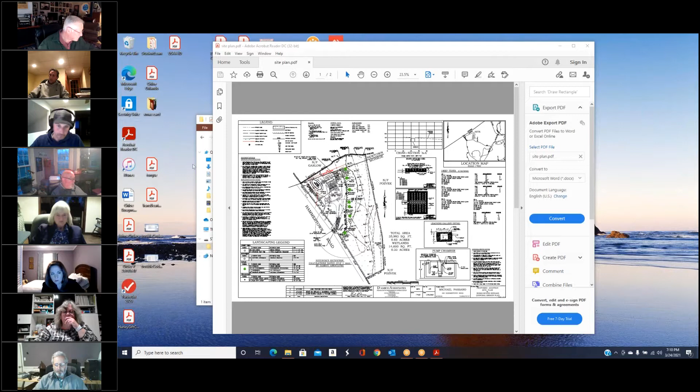What we're proposing is in an area that was already cleared, and you can even see on the east side there's an existing shed on the other side of the wetlands, which shows the entire parcel was really being utilized, and it was obviously disturbed prior to this proposal. So I don't think anything we're doing will be detrimental to the wetlands. If anything, I think we'll be cleaning it up.

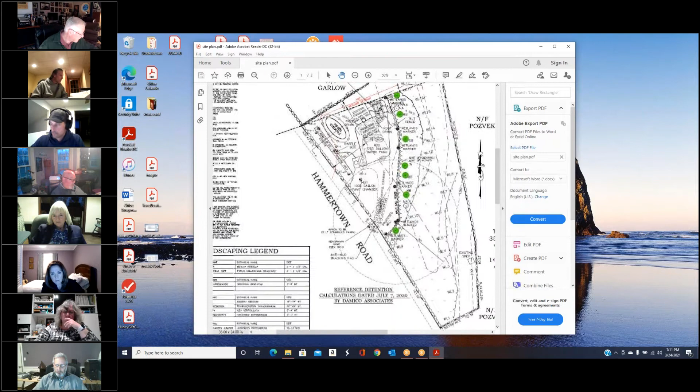We're going to keep the existing gravel driveway, so we won't be extending a driveway at all, and we won't be going towards the wetlands at all, except for the proposed drainage galleys to mitigate the increase in runoff from the proposed addition. You can see there are 4 proposed galleys directly to the east of the existing dwelling, approximately only 10 feet away.

From there, we're actually going to fill just a little area to make sure we're above the modeling for the detention galleys. There's no fill required for the septic system, and the conditions for the septic system were fine. As a matter of fact, it's already been approved by the health department.

The other thing we're proposing is wetlands plantings, and I have them just over what I call the limit of clearing and limit of activity. The only activity past that would be just the plantings, proposed to plant right along that clearing limit to help ensure no one goes further into the wetlands.

We're also proposing a split rail fence, which is the heavy dashed line right along there. You'll see the silt fence, then the split rail fence to the left of it, and to the right of it is the limit of clearing. I showed the proposed plantings just to the right of that.

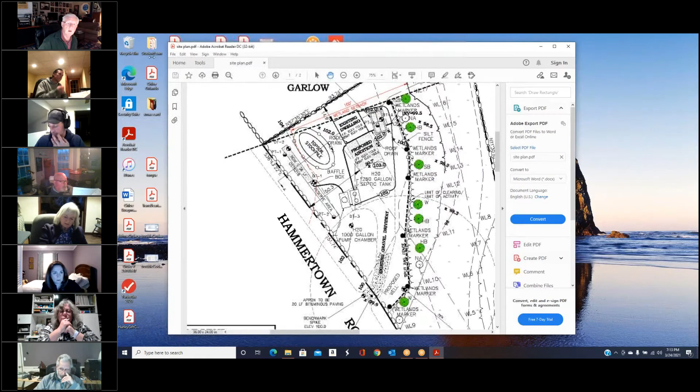I know there was confusion as to what's the limit of clearing and why the plantings are past the limit of clearing or limit of activity. But like I said, the only thing we're proposing is those plantings. If necessary, we can move the plantings back on the other side of the limit of clearing, or vice versa.

We're also proposing the wetland markers, shown on the plan. There are 6 wetland markers, mainly at every bend, so that they're less than 50 feet apart.

The septic system, like I said, was approved. It's a pump up system, and the system itself runs right along Hammertown Road, so it's as far as possible from the wetlands. The closest activity to the wetlands would be the well. We have to keep the well 75 feet away from the septic system, so we placed it to the south as far as possible to ensure we have that 75-foot setback.

Other than that, I believe the plan is basically just one little residential dwelling that we're increasing the size of slightly, but everything else, there's basically no other activity on the site. I'd be glad to answer any questions.

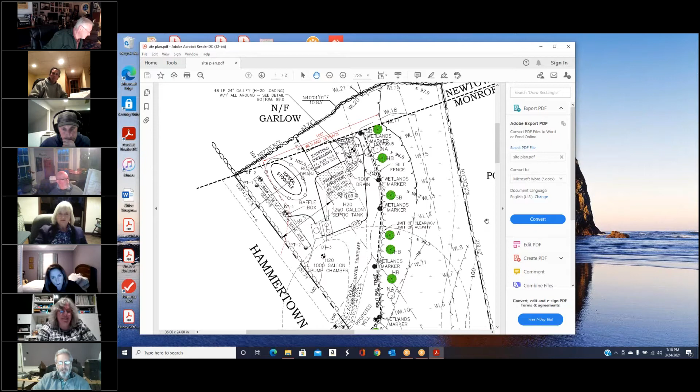Alright. How do they access it? Do they trudge across the wetlands to get there? I think you could actually walk right to it. Even though it's shown as wetlands, you really can walk to it. If the commission feels people are going to constantly walk there and cause a disturbance, I'm sure we could talk to the applicant and maybe remove the shed, or replace it in front of the silt fence so they won't have to cross the wetlands.

That might be a boon to the future owner rather than having it. I don't know if the homeowner would want to be tracking all the way to that shed. I mean, what's the point of the shed? That's what I was getting at. It might be a good thing, but that's not our call. I just wanted to throw it out there.

Is there anything else that drains to the leaching gallery? The only thing going to the leaching galleys would be the septic system, and the galleys in the back are just for the roof drains. Okay, that was my question.

Scott had mentioned something about the footing drains. Have they been revised? Yes, I originally showed footing drains, but realized that was a mistake on my part because it's actually a slab on grade. The existing dwelling is a slab on grade, and the proposed addition is also going to be a slab on grade, so there is no need for footing drains.

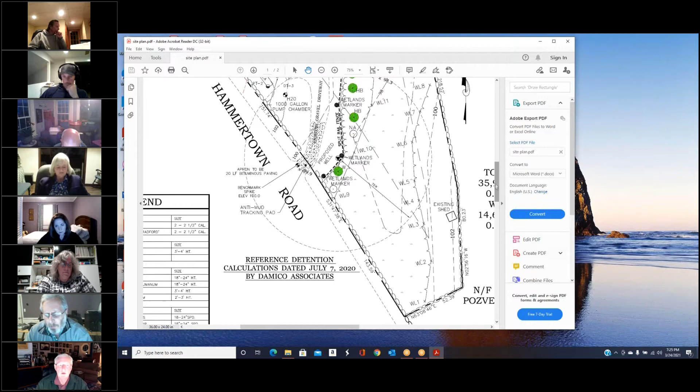So, since the brambles and the multiflora rose do not thrive in the shade, should we be planting more shade trees to keep them under control? I think right now there's a couple of scattered trees. There's a cedar tree, a shagbark hickory, and I don't remember the other. So there's partial shade already. I'm not familiar with the planting plan because I wasn't involved in that, so I'd have to punt that question back to Mr. D'Amico.

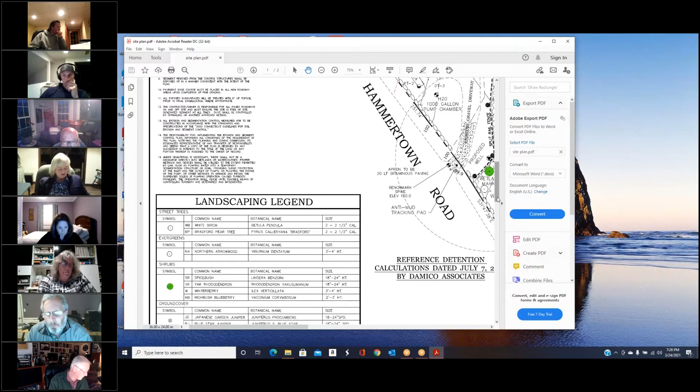Okay. All right. Thank you, Mr. Danza. You answered all my questions. Then back to Mr. D'Amico. You mentioned a bunch of trees and bushes that you were proposing to plant, but there's no quantity. We would need to have that in order to approve this, so that we know exactly what it is that we're talking about. And if the area really is as sparse and disturbed as Mr. Danza was indicating, we might need a little bit more to create a better buffer.

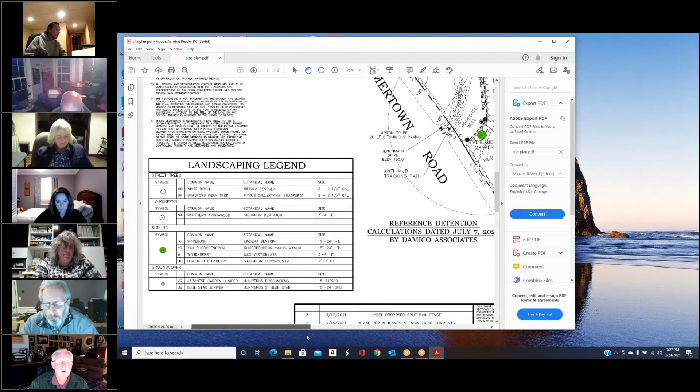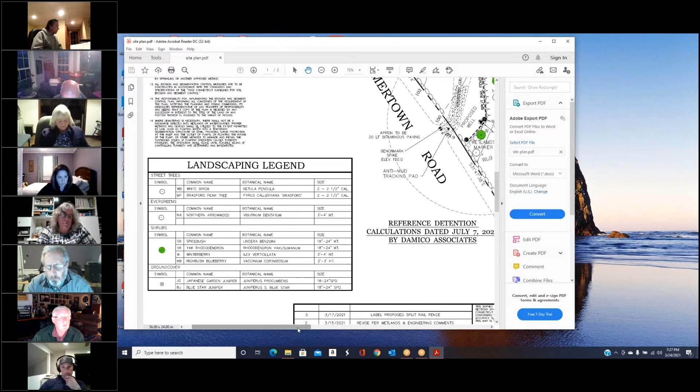What I did is I showed the plantings. If you could actually count them on the drawing, in the legend there's two northern arrowwoods, and then you could see on the other plantings there's, let's see, 1, 2, 3, I believe 3 spice bush, and then I have 1, 2, 3. I believe there's 3 high bush blueberry. So even though they're not numbered, you could see right where they are, because there's not that many that were proposed. If you want, we could add a couple more.

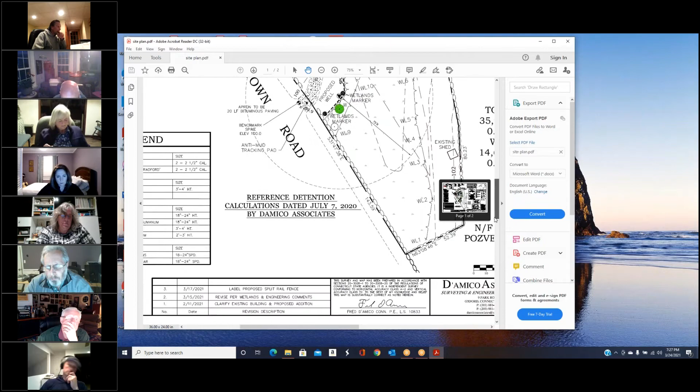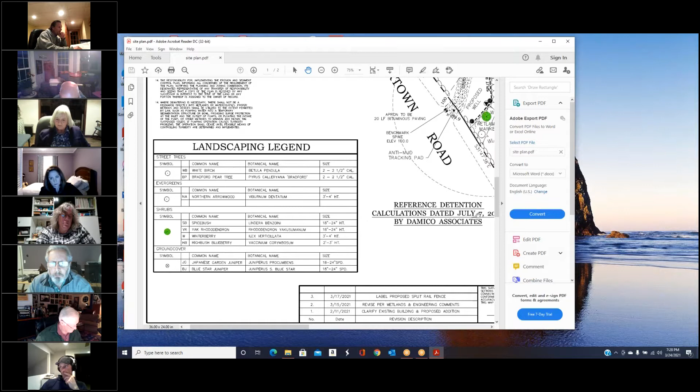That's not a problem. As a matter of fact, if it's approved, you can make that a part of the approval. If you want the plantings twice as much as what's there, I'm sure the applicant has no problems with that. But we were just hoping that it would be approved. And if we have to add more plantings, we have no problem with that. But by looking at the drawing, you could see how many plants there are, just by seeing where they are and counting them.

I'm doing just that, and I'm not coming up with the same, the two don't seem to jive. I see seven green symbols, but there's four plants in the legend. So that's one for some and two for others, which is a little bit nebulous. Yeah, I counted wrong. There's two that are labeled W, which is a winterberry. I forgot to mention those. I was counting them as something else.

So the two that are shown that have a W are winterberry. There is two spice bush, and then the HB, which is the high bush blueberry, there is one, two, three of those, and then the other small bush, which is NA. There's actually three of those. For some reason, the NA fell off the last one, but the NA is a northern arrowwood, so there should be three northern arrowwoods. I could add the quantity in the landscape legend if you need it. And if you want me to add some more plantings, I have no problem with that.

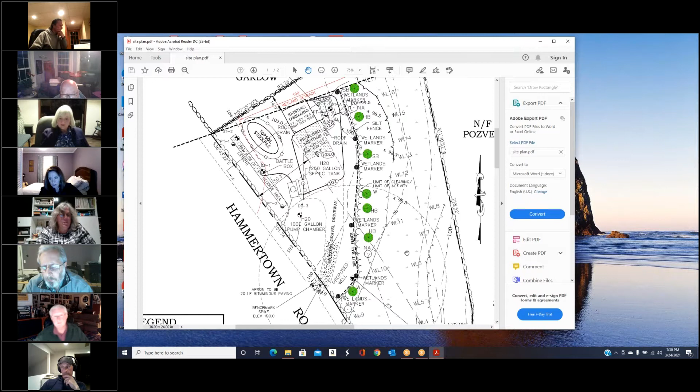Well, I can't speak for the whole commission, but I know that I would like to see it a little bit more well planted, a little bit more dense. But I will also ask the other commissioners what they feel about it. And other than that, Scott had a whole bunch of comments and I didn't know if any of them were addressed. And the same with Denise's comments. Let's make sure everybody's zeroed. I believe I addressed all of Scott's comments.

We didn't get a revised report, so I don't know from Scott's angle where that was. What's the last report you're looking at, Lois? Mine is dated 3/15/21? No, mine's 3/4/21. Okay, so I do not have the most updated copy then. Okay, Denise, were all of your comments adequate? 3/4/21? I don't even see a 3/4/21. Yes, my comments have all been addressed.

They basically were addressed in the set of plans, but in the plans we had gotten submitted, I guess some of the layers were off. I spoke with Mr. D'Amico about it, and he sent me the revised plans, which is what we have now. The details I was looking for were all on the back, and we talked about the legend and what some of the symbols meant.

Okay, and how about Scott's comments? I mean, you said you have a revised one. Are any still open? I have one that says, oh, wait, hold on. 3/18 is the one I have. I'm sorry.

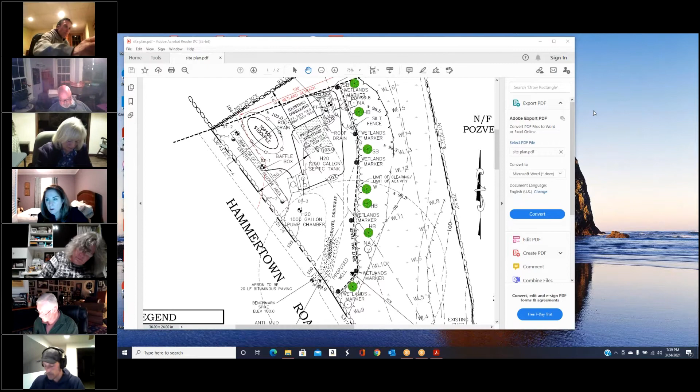So do we make a motion to close this regular hearing? Make a motion that we close this regular hearing. Got a motion to close the hearing, motion by Commissioner Gainer, second by Commissioner Hall. All in favor? Aye. Aye. Motion passed unanimously. Moving along, public hearings, we have none. Enforcement, NOV discussion, nothing. Remediation conditions, IWC 2020-02, 224 Guinea Road. Remediation plan to remove fill and replant the wetlands area.

Okay. Mr. Bjorklund was not able to make it tonight. He had another meeting he had to attend. 2 weeks ago, I received an email from Attorney Lito with an attachment. I sent it off to Dave. It still had some open-ended issue questions. And so what Dave said to me is, I sent the draft to the client and asked that they forward it to their attorney for review. I have heard nothing back. If you could share this with the IWC, I'd appreciate it. So that's all we have right now. So it's in the applicant's attorney's hands now. Okay. So we're tabling this one again? Table it again. Tabled. All right, sounds good. I don't know what else to do, if that's the situation we're in.

Okay, so application hearing determination, IWC 2021-03, 8 Crownview Drive, new home construction with associated site improvements, pool and pool house. So this is just the determination of whether it's a regular review or public hearing. Yes. Make a motion that we move this to a regular meeting. I'll second that. A motion to move application to a regular meeting, a second by Commissioner Hall. All in favor? Aye. Motion passes unanimously. IWC 2021-04, 5 Victoria Drive.

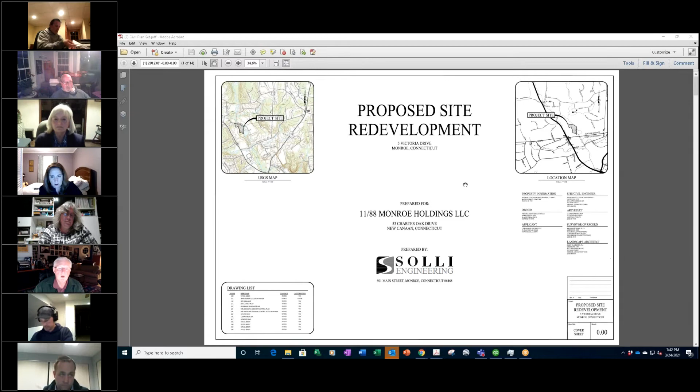For the record, my name's Kevin Solli. I'm a licensed professional engineer in the state of Connecticut with Solli Engineering. Office is at 501 Main Street right here in Monroe. So this is a site at 5 Victoria Drive. The commission's probably very familiar with it. It's the location of Ole Soccer. We've been working with the planning department for some time. There's an interested party to purchase the property, and they're looking to do a building expansion to provide an indoor box lacrosse facility. We've gone through a couple different steps with planning the site.

The zone was recently changed from industrial to business 2, and the parking requirements for the indoor recreation were reduced so we could minimize our parking that we would have to construct on the property. So we are proposing a small addition, and then essentially working within the limits of the previously approved Ole Soccer. We would assume that this would get scheduled for a full public hearing, and we'd be happy to see if the commission would be willing to accept it and then schedule that for your meeting, maybe for your last meeting in April. Does that work with your schedule? I think on the 28th.

Okay. I guess basically, Kevin, you're basically saying that you're expecting a public hearing on this anyways, right? We would, yes. Okay, so someone want to make a motion on that? Before we do, can I ask, usually when we get an application to determine, we get a chance to look at all of it, which we haven't really gotten to. Could we just flip through whatever other sheets there are in this plan set?

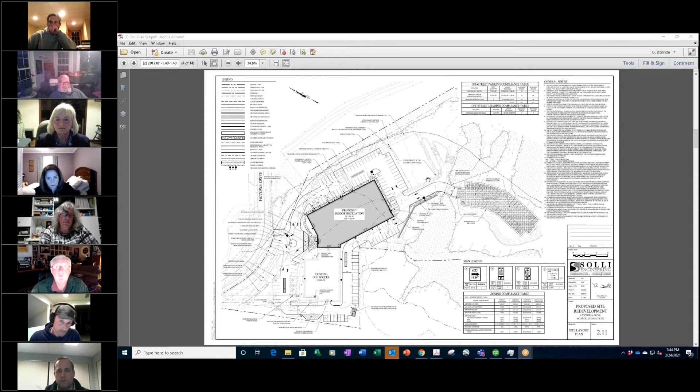Absolutely. So site plan, again, just a proposed building expansion with parking primarily around. We are actually proposing a surplus parking lot in this back area, which we're proposing to be gravel, so not to create additional impervious surface. And we are maintaining the back portion of the existing field that was established as part of the Ole soccer approvals. From a grading standpoint, we're trying to minimize grading as much as we can. A portion of the building is being constructed in a floodplain, so we're providing offsetting compensatory storage to not have an impact on the flood carrying capacity of the property.

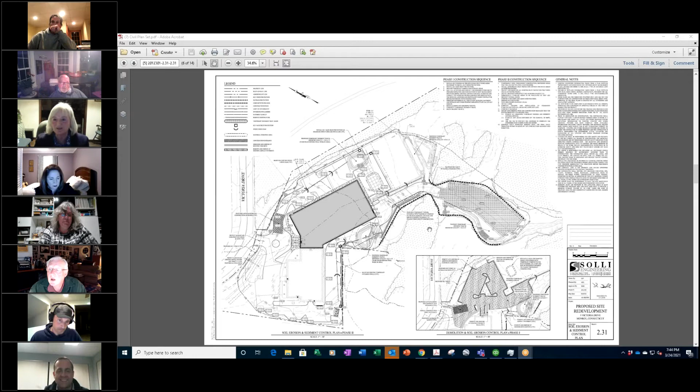Okay, I'm sorry, Kevin, I was not explicit enough. I just wanted to see what other sheets are in the plan set. Usually I look for, like, is there a planting plan? Are there things that I'm going to ask for in the future? So if I know they're there, we can expedite things. That's all. We do have a landscape plan. Yes, we do have a soil erosion sediment control plan. Our normal plan set package that we prepare. So we do have that included in our application materials. Okay. All right. That's really all I wanted to know. Thank you.

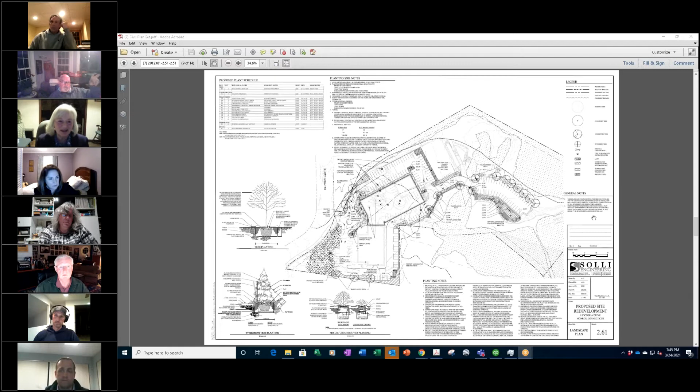I move we bring this to public hearing. Motion to bring this application to public hearing from Commissioner Spence, second from Commissioner Gingras. All in favor? Aye. Aye, motion passed unanimously. Got a question though. Did he ask for us to do this not the next meeting, but the meeting after? That's on his application timeline. Oh, okay. Whenever he gets his stuff submitted, it gets on the agenda. Okay, I just wanted to make sure because he did say that. I just want to make sure everybody knew that.

And I was able to expedite the pending legal notice that should go in next week. So it looks like potentially, Kevin, that date is correct, that we could get you on for the second meeting in April. Great. Thank you very much. Okay. I'm trying. Yeah, we appreciate it.

We're on to E, other bond release reduction reports, none. Time extensions, none. Discussion, 64 Cambridge Drive, request for informal discussion. Is this me again? It's you again, yeah. Sorry. No, it's okay. I didn't know if there was going to be any other discussion or anything. So thanks, members of the commission.

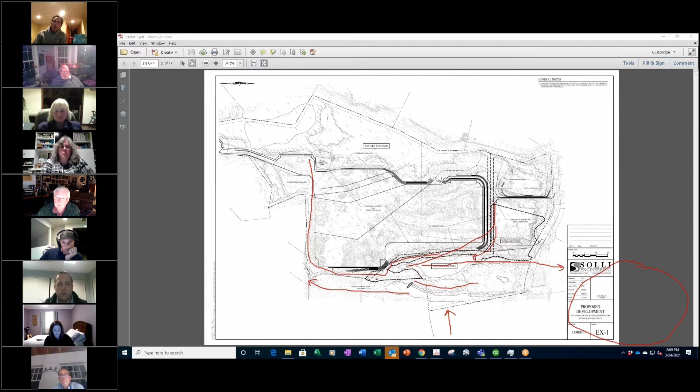So the vernal pools dry up at some point in late spring, correct? Correct. So during the period of time that they're supposed to be damp, keep the pump running, and then when they naturally dry out a little bit, would you shut the pumps down? We could. That vernal pool breeding season is essentially right around now through mid-May. So that's something we could talk through with Bill Kenny, our soil scientist, and develop that optimal plan. That's a great suggestion. Yeah, I would like to see that. That's it.

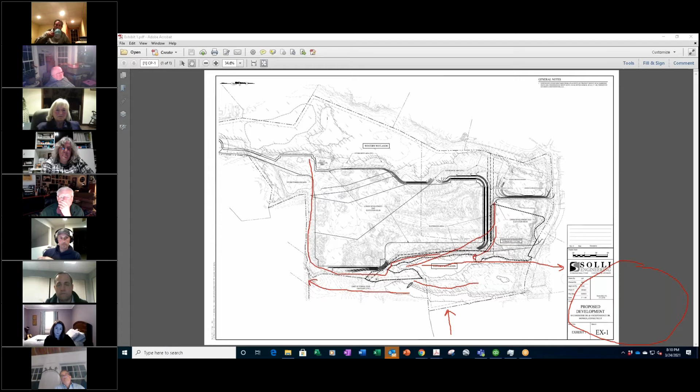Okay, I think we're done with questions for this round. Kevin, you were going to continue on with some other comments? I just had one other comment. So one of the things, as I mentioned, is we've had a lot of inquiries about other fill that's available, that's natural, clean material.

We're going to have discussions with planning and zoning, but what we're interested in potentially doing is the regulated area on the property, even from the vernal pools—I'm highlighting in red here. So there's an area that's actually outside of the wetlands regulated area, but we're going to talk to planning and zoning because this material is available. We wanted to see if the commission had any issues if we were to work through this with planning and zoning to set up a stockpile area on the property, with adequate silt fence protection to make sure it's protected. But outside the regulated area, where we might be able to import and stockpile some material as it becomes available, because all that will do is speed up our overall timeline to get this project finished as fast as possible.

I would think that if it's out of our area, we don't really have anything to say about it, right? Is that right? I have a question though.

The vernal pool that's in wetland 1, are you taking that into consideration, the 500 feet from that vernal pool and its associated wetland? This line here is actually that 500-foot buffer from... no, that's the other vernal pool, because there's a pool and a wetland 1. You were in wetland 2. Yeah, that one. Yes, so that is the 500-foot line, and that 500-foot radius intersects the 100-foot buffer here, somewhere about here—that's where that transitions out. Okay, thank you.

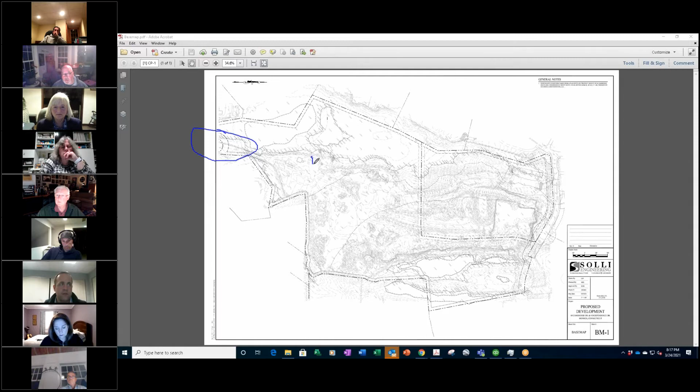Is it all down here, related to the cul-de-sac and outside of it? The new work is kind of outside that area, I believe. It is. And especially with trying to get this pump going, this is something simple where we'd drop off a plan showing where we'd be putting a pipe and along the edges, and what that would look like in terms of distribution.

That's what we want to start right away, because as much as people said this was toast, if I was a betting man, I'd wager we'd show increased activity from last year as long as we get this water flowing in the next couple weeks.

Can we see a plan before you start pumping, as to when you should stop pumping? Of course, and that's what I wanted to submit right away, hopefully something we can get in and review at the next meeting.

I mean, the remediation or restoration applications, if they don't follow standard statute - if that's something we get in right away, is that something we could actually receive, review, and potentially approve at the next meeting?

So this could potentially be happening pretty soon - at your next meeting, which is April... is that right, April 6th? No, April 14th. So this could theoretically be happening April 15th. The peepers are out there now - they were out there last week, not at your property, but behind my house. So hopefully this can happen.

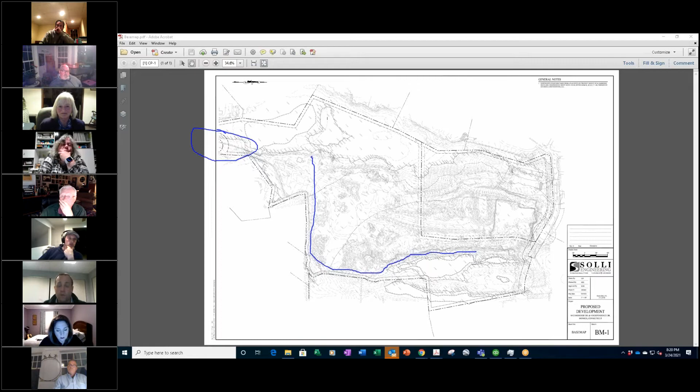Thank you. Kevin? Oh, there you are, yes. Sorry, I was looking at - it's like the Brady Bunch. I'm just looking at my calendar.

So would you be able to submit something, say either the 31st, which would be next Wednesday, or the 7th? Yes, we could get something next Wednesday for sure. I mean, we can do the 7th - that still gives me enough time to get it to the commission, so they have time to look at it before the meeting. Sure, okay, all right, good, great, okay.

Excellent, thank you all, very much Kevin. You're welcome. Thank you for coming up with something real quick, so hopefully we can get this behind us quickly.

Thank you. All right, now on to the deliberation session - deliberation of completed hearings, completed items on this agenda as determined by the commission. That brings us back to - what is it, which one was it? IWC 2021-02, 560 Hammertown Road. Yes, correct.

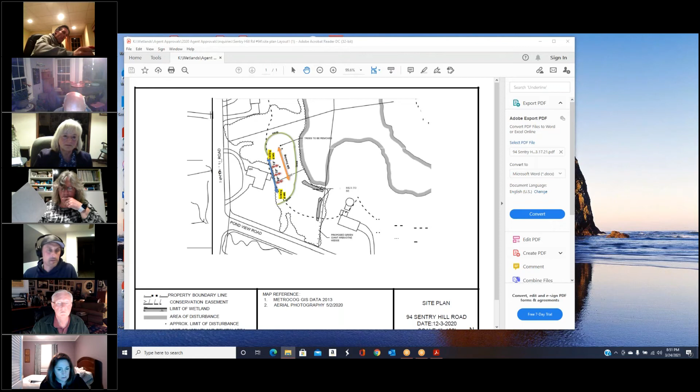Okay, now on the next one for 163 Barn Hill Road. Hold on one second, Denise, wouldn't it make sense for these Sentry people to just come in and talk to us at the next meeting? Like in the beginning, maybe in the informal discussion, or whatever.

Want them to, I mean, if we're going to go in terms of an agent approval, so we get a direct idea from what they're looking to do directly from them, right? You know what I mean? So we speak to them, we get a clear understanding of what they're looking to do.

Okay, so I'll have them at the April 10th meeting, I think it was. 10th meeting, 14th, whatever. What was it, 14th? Okay, right, now you have me double checking. Hold on, yeah, I just looked, it's the 14th. Okay, oy, March and April sometimes overlap, same, yeah, with the dates, but okay.

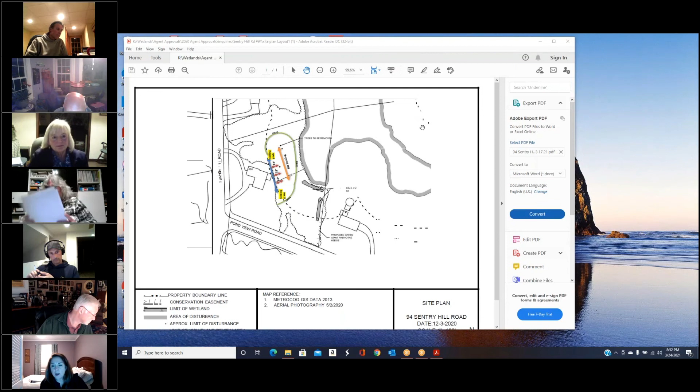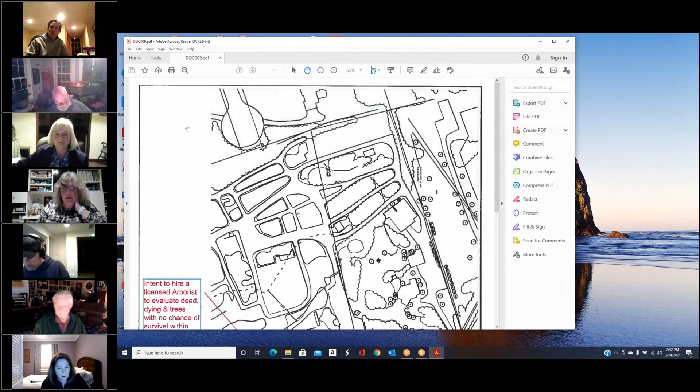Okay, so then 163 Barn Hill, that's the other map that I gave you. Now, 160, does everybody have that little map that's like a triangular area in blue? And then he had some, yeah, that's the map right there, it's on the screen. I don't have that one. Okay, I'll look at the screen.

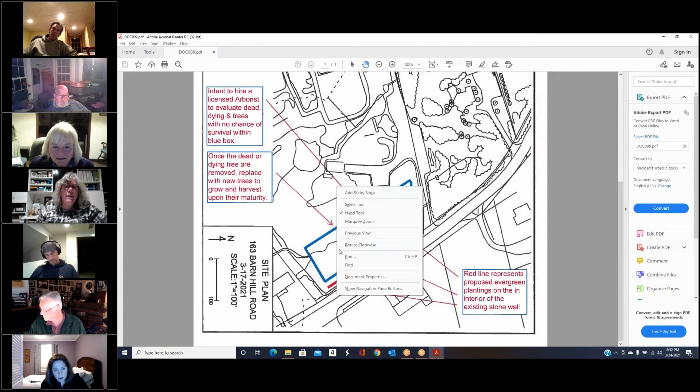Oh, okay, I don't see it either, unless it's, unless I got it after this packet went out, I thought I got it prior, but okay, so the area that's in blue. Oh sorry, hold on, what? I'll just rotate it so you could actually read it. Is it important?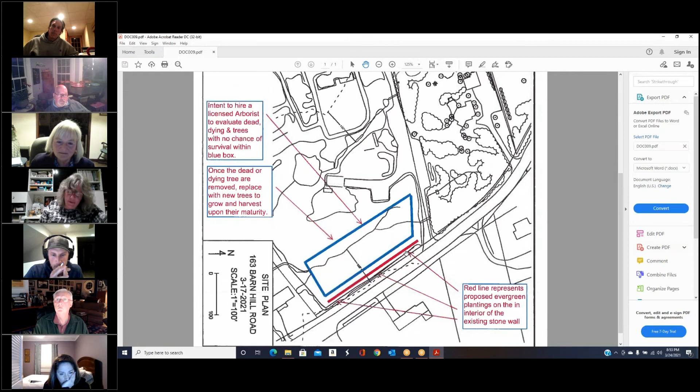Okay, there we go. So the area in blue, there's a little bit of a stream, there's a culvert under their driveway, and then there's a stream in that area. They have a bunch of, they want to get an arborist in there to take a look, because there's a lot of trees that are dead to remove out of there. So they want to talk about, now they did also say they want to replace with new trees to grow and harvest upon maturity.

So I wanted to kind of talk to you about that, whether that's allowed, because some of it's in a wetland area. It's not just the upland review area. And then they also wanted to do some plantings behind the stone wall in the front that abuts Barn Hill Road, to help beautify and kind of clean it up a little bit, make it look a little bit nicer.

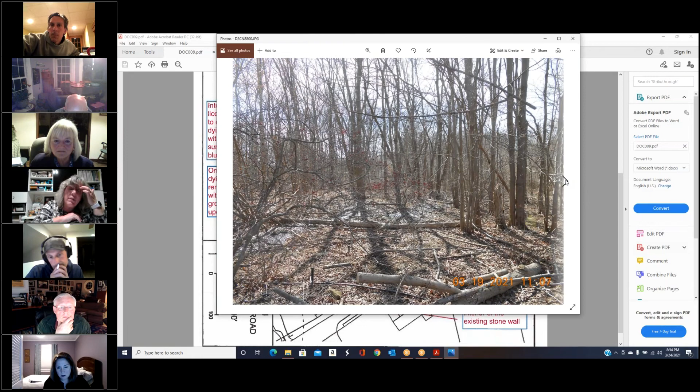I did have some pictures as well. I know that I had pictures that I put on the jump drive, just to try to show you a little bit of what the area looks like. So that's the area that's in the blue, with some of the trees and what's been down and just kind of laying there. So they want to go in there and clean that up a little bit and plant it with some new stuff. The word harvesting is the only thing I'm a little bit... just trying to show you where the culvert is. I'm sorry, pardon?

Denise, this is a residence? No, there is a residential house to the right of this driveway. I don't quite understand. So here's the two rows of the red twig dogwoods, I guess. That's what I think they are. But there's the wall a little bit behind it to the right, yep, right there. That's where they want to put a row of evergreens.

On the roadside or the wetland side? On the back of the wetland side. That would require them to dig all those tree stumps out. Or are they not taking those trees down? Some of the trees, this is where they want to get an arborist in to have the dead diseased trees removed, taken out, and then replant it with some things, but they want to put a new hedge of evergreens in that area.

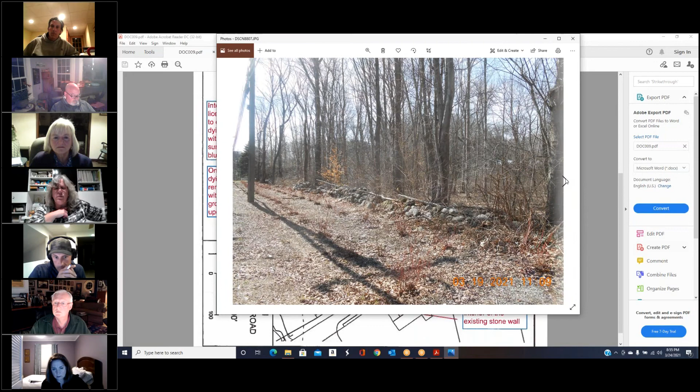So this is all to create a grand entrance to the new nursery? Basically, and because it really is an eyesore. If you drove up Barn Hill Road, there's a pond further back on their property that feeds down. There's like a little waterfall that goes down towards some of the houses towards Israel Hill Road. But when you get up to this point, so much is just down, I think they want a little bit of screening and to beautify it and also to clean it up.

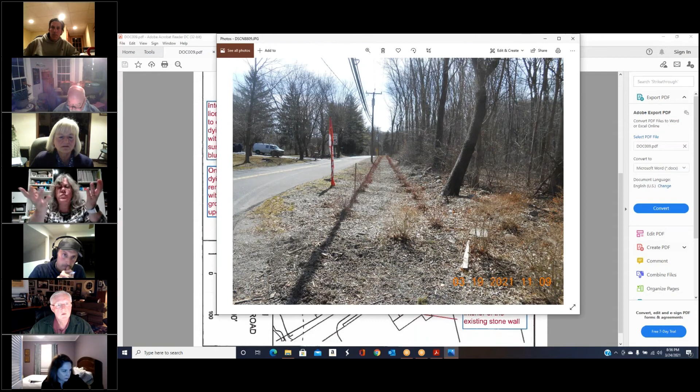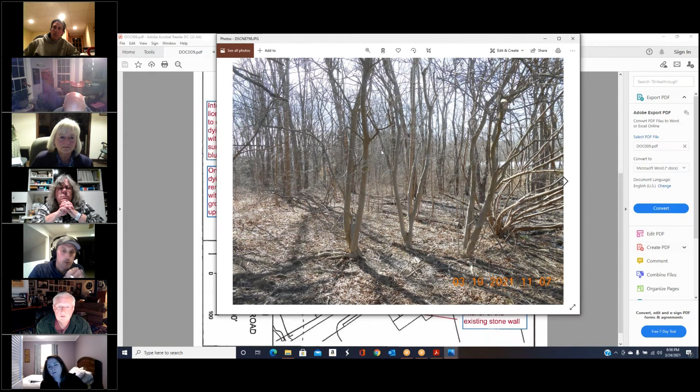So this is the old Twombly nursery. Well, I guess, yeah, the sign says Twombly on it. It was before my time, there was no nursery there since I've been here. It's just been stagnant land. Oh, I thought the new owners were operating out of it, but maybe I haven't seen those trucks in a while. It's Cornell Farm is what they're called. They're not Twombly. Twombly sold Twombly Nursery, and it was in business under new ownership. Those guys must have folded or left, and then there's these new people here that have been trying to take care of it.

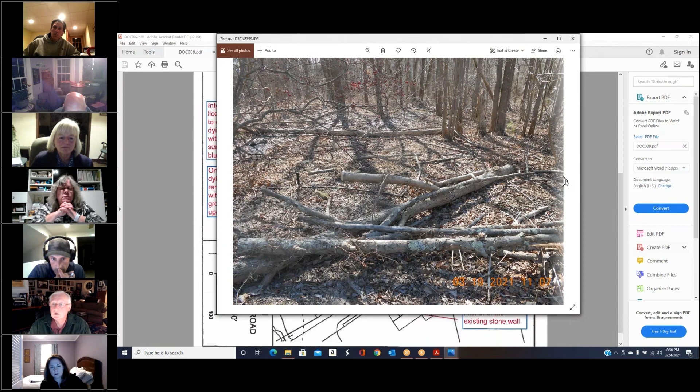Well, my first thought is that if they're going to clean up the wetlands, then they should have to winch any plant material out of there or hand carry it. I kind of mentioned that to them. Yeah, tractors or any other type of equipment would not be allowed. And if they're talking about harvesting trees in the wetlands, they can't be tree spading out the trees so they could sell them as live trees. If they were going to cut them down and sell them as Christmas trees and then replant it, I don't see a problem with that, as long as they do the activity from the other side of the wall. That's just me, I'm not saying this is the decision.

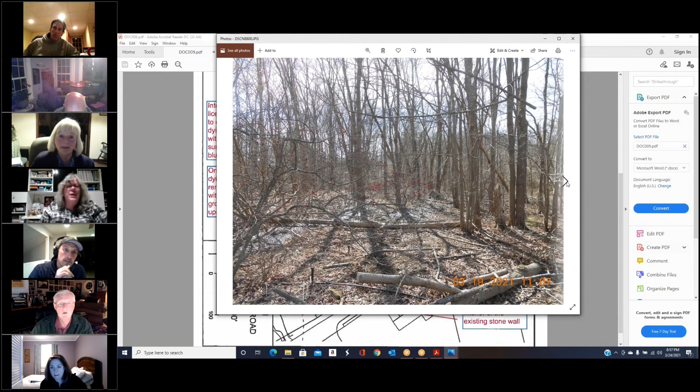We just need a better definition of harvesting. Yeah, if they're talking about tree spading the trees, no, because that means a piece of heavy equipment has to get up to them and spade them out. So it sounds like if they're planning on planting something that they're going to harvest, they're planning on clear cutting the whole thing in order to plant something that's going to grow to a point where you can harvest it.

So are they talking about clear cutting everything or just leaving the good stuff and planting? No, they said good stuff, because it says intent to hire a licensed arborist to evaluate dead, dying, and trees with no chance of survival within the blue box. That's exactly how he wrote it. He said they're going to get an arborist to tag what's bad in that area.

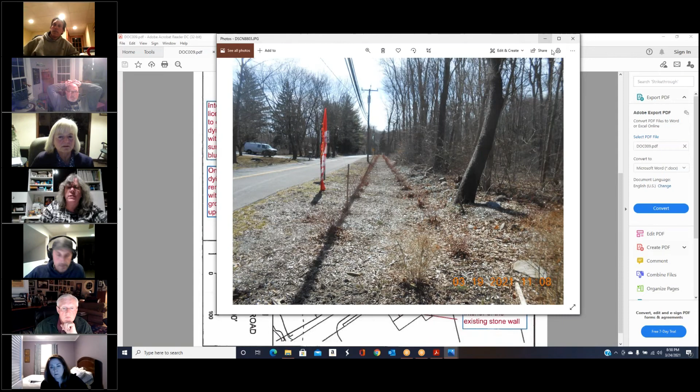Okay, on your drawing there, Denise, or whoever's drawing this was behind the pictures, the red line said proposed evergreen planting on the interior of the existing stone wall. That should just be a straight line. That is a straight line, that red one. Yeah, that should be a straight line, Lois. They shouldn't be planting anything else in that blue area, especially nothing to be harvested. And they couldn't go in there with equipment to plant anything significant anyways. If they wanted to put some wetland species plants in there, like little seedlings with a little hand shovel, well, all the way, right?

The way Denise read it, it was kind of nebulous, because it sounded to me like they wanted to put evergreen trees along the road to beautify, but that's not what they were going to harvest. They were going to do something else behind that area in the blue box. Was I misinterpreting? No, the arrow into the blue box says, once the dead or dying trees are removed, replace with new trees to grow and harvest upon maturity. Oh yeah, you're right. That is pointing to the blue box, which is in the wetlands area. How much footage are you talking about? You can't do it. Nope. No harvesting in the blue area.

No, if they were... I'm not sure. I've got to do a little bit more research. How about these guys come in too and talk to us about what they're trying to do? Yeah, this is gonna be a discussion one. Because obviously they're a nursery, they're in the business of agriculture and growing stuff and whatnot. And maybe, I could be totally off base here, but if they're considered a farm, maybe they're working under some slightly different rules.

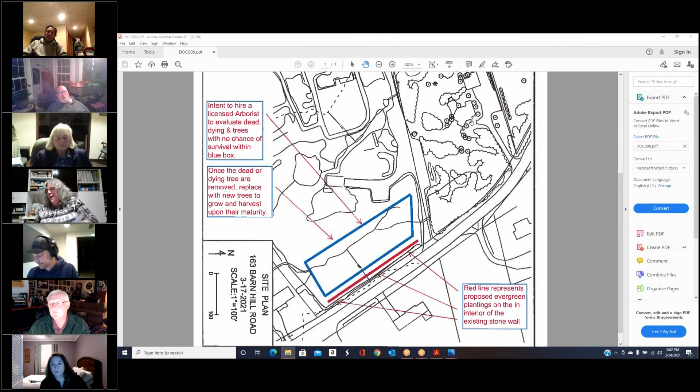Good enough. Oh, one more. Sorry, I lied. 118 Elm Street. I don't know if you remember it.

This was the one where the fella came in, he was redoing the shed in the back of the property, and we have the marker posts. And behind it, there was grass planted around the lake, and you saw all the trees that were down that were beyond the... well, he was supposed to have plans to us. I sent him a reminder on March 10th, and I still have heard nothing.

And did we ever send that? Does he have an NOV on it? Yes, he does. He came in front of us, and I remember him coming in, but I couldn't remember if we had decided yet. Yeah. All right, so what's supposed to be the next step? We gave him until the 24th. We told him he had to apply with a set of plans by the 24th. I reminded him on the 10th.

I basically said, this is a follow-up to your violation at 118. To date, there's been no known contact with our office regarding this issue. Please be advised that the Inland Wetland Commission puts dates into place for reasons, and failure to follow these guidelines may result in this issue being pushed to a citation where fines are possible. And I've heard nothing. Did we refer this to planning and zoning as well?

Or do we not normally do that? Would we do that? Well, planning and zoning was made aware of this too. I mean, they know because he doesn't have a building permit. He's been doing work on the property with no permits. It's also a zoning thing, but I can't talk for zoning. As far as I know, I don't know of any violation being issued by them, even though it was discussed.